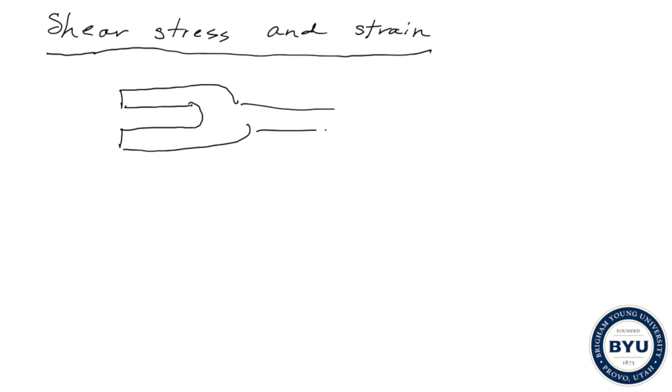So we're going to introduce shear stress today through an example of a bolted connection. Let me draw the geometry of our example here. Okay, still getting used to this tablet thing I'm using. So this is one plate here, and then there's a bolt here that is coming down through the geometry of the connection and keeping this connection tight.

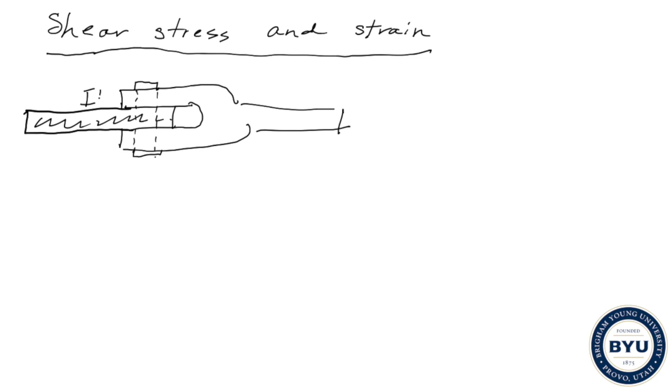So the dimensions here are h and h. Then the thickness of the plate is going to be t. And similar to what we did with normal stress, we're going to go ahead and load this thing up with a force P on both sides.

Notice that here, rather than being just a simple axial bar with a prismatic cross-section, we still have an axial load, but the configuration is different. So your intuition tells you that if the force P is large enough, this bolt actually will shear. We even use the word shear. It will shear off, and the stress that develops that causes that to happen, we call shear stress.

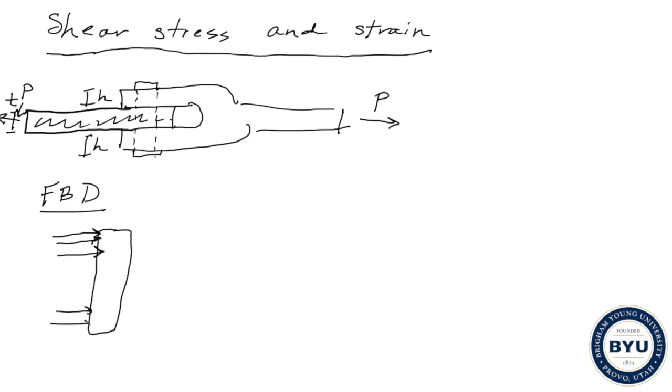So if we go ahead and look at just this part of the connection in terms of a free body diagram, it looks something like this. So we'll take the bolt out as a free body. We'll draw the forces that are acting. We have this distributed force coming from this top part here, and then a distributed force coming here. And likewise, on the other side, we have a distributed force.

Now, if we turn these distributed forces into resultant forces, you should get the expected result that the resultant force should have magnitude P, and that these resultant forces, as you can guess, should have magnitude P over 2. So that's a free body diagram.

Now the question is what are the internal forces that develop in this free body diagram, this bolt? These are the applied loads, the P over 2 on the top and the bottom, and then the P here. But unlike before, where we just had a very simple stress state, the stress state that develops, the internal force stress state that develops in this, is quite complicated.

And to introduce the idea of shear stress, we're actually going to look at those internal forces right on this shear plane. And what we'll notice is rather than having stresses that are acting normal to the cut plane, they're actually going to act tangential, as your intuition would dictate.

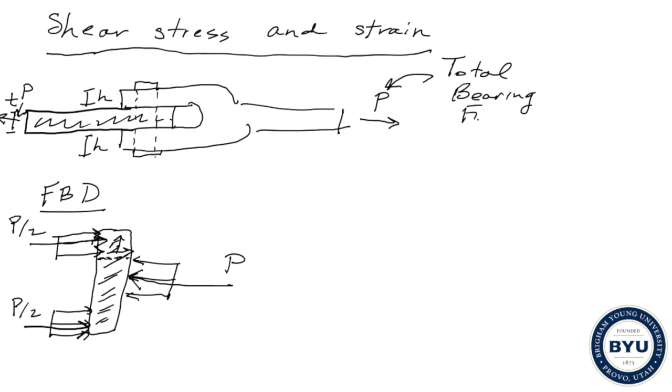So often we will call P the total bearing force. And then the question is how do we really deal with this curved circular geometry when we're engineering bolted connections?

So let's take a look at a close-up, a little bit more detailed drawing of the bolt geometry. As best as I can do here as I learn to use this tablet. It's not very good, but you get the point. Now if we look at the image, if you were to, for example, project the image of this bolt as a shadow onto a wall, it would actually look like a plane, wouldn't it? Something like this.

Okay, so this here would be kind of the projection of this bolt onto a plane. And so even though if you were to look at these resultant forces, these distributed forces, I should say, they're actually, in reality, kind of wrapping around the circular geometry in a very complicated way.

Rather than actually capturing that circular area in order to calculate the stress, what we'll do instead is idealize the bolt to a plane. So we'll say the cross-sectional area over which we're going to distribute the internal force is just going to be this plane. We'll call this A sub B, the area of the rectangle.

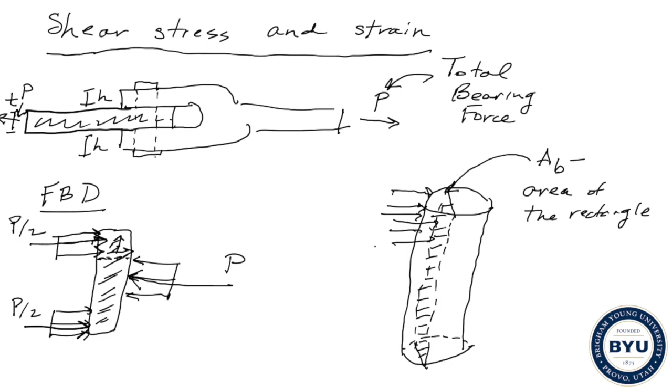Okay, and again, we have this distributed load acting down this beam, and that is going to be our bearing force. So what we'll say is, if you take this bearing force in a bolted connection, like for example, this little close-up of the bolt perhaps is just this piece right here.

So if you look at this bolt, the way that we calculate what's called the bearing stress is simply F sub B over A sub B. Now notice that this actually isn't exactly right. This is what we would call an engineering idealization. We've made an engineering assumption that by picking this area here to simply be the rectangle, that's close enough to the actual stress from a design perspective.

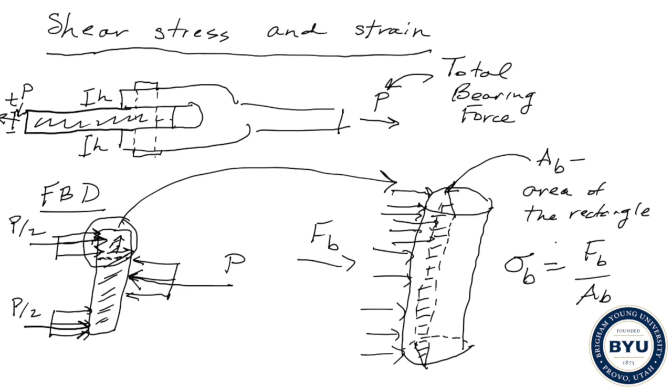Okay, now let's develop this a bit further, this idea of stress. Let's take a look at a different free body diagram.

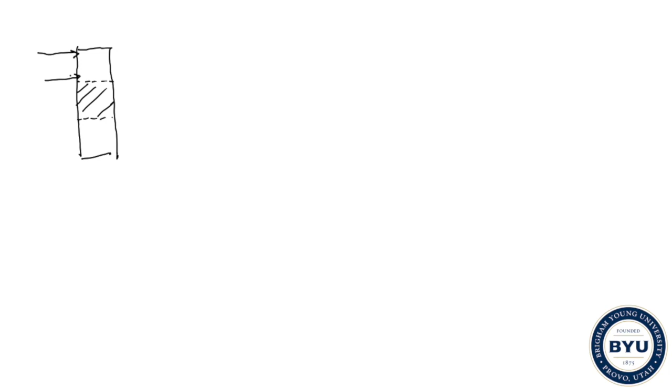So let's draw our bolt that's in shear. We have our bolt, it's in shear. And instead of looking at those top and bottom portions where we introduce the idea of bearing stress, let's actually take a look at this middle section. This is as it was before.

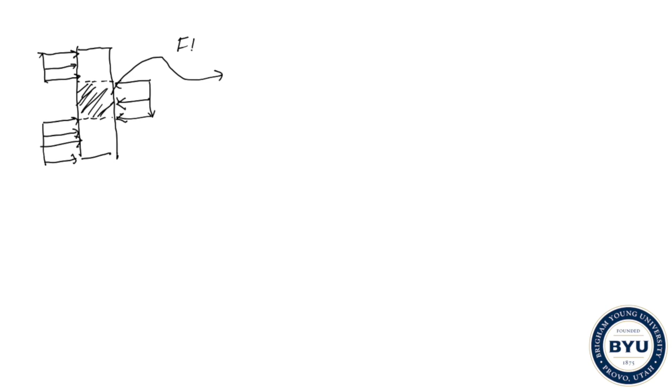Now what we want to do is pull this thing out here as a free body diagram. We're going to look at all the forces acting on that free body diagram. So the free body diagram is this part of the bolt here.

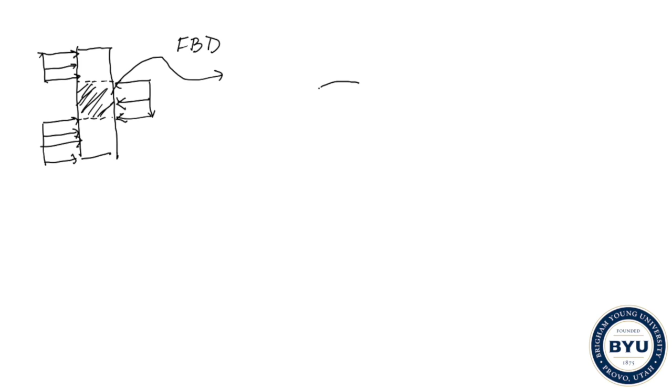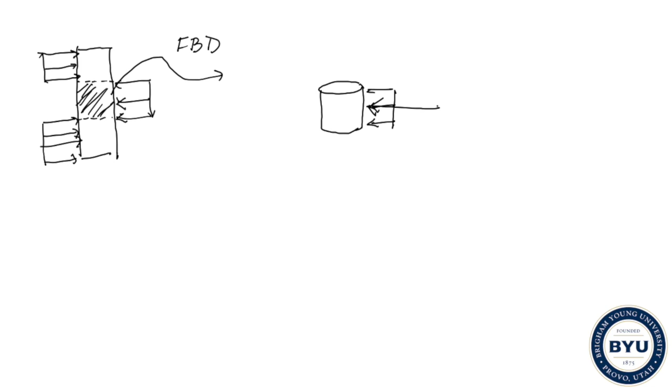And then we've got this distributed load acting on this side, which we will resolve into a resultant force. This is often what we do. This resultant force is magnitude P. And then there are forces here.

If we want to have a balance of forces, we have to figure out what forces are acting across the top of this bolt, right? Because there are forces over here that have to be accounted for in this free body diagram in order for us to have equilibrium.

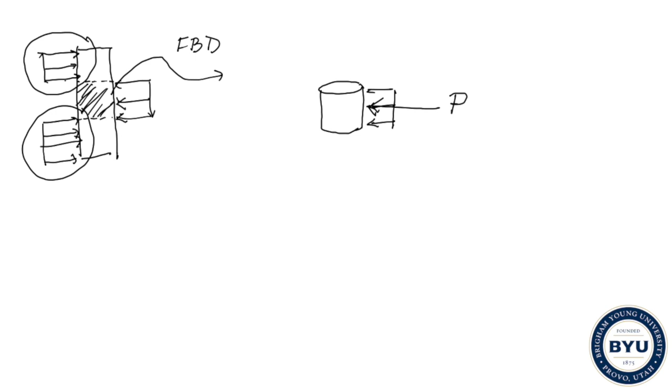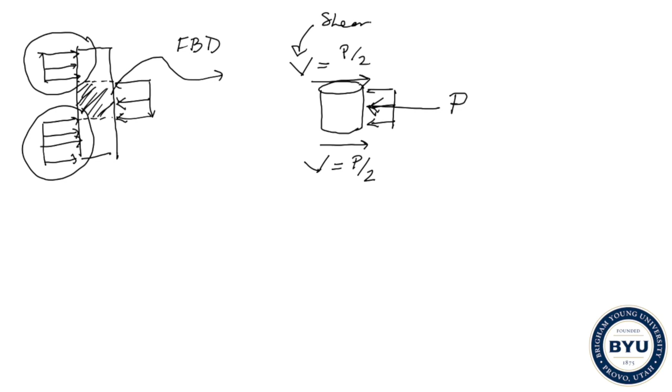And so the resultant force coming from here we'll just call V, equal to P over 2, acting like that. And then this one is likewise P over 2. We'll call this a shear force, for example. Let's see how it's shearing across the top of this bolt.

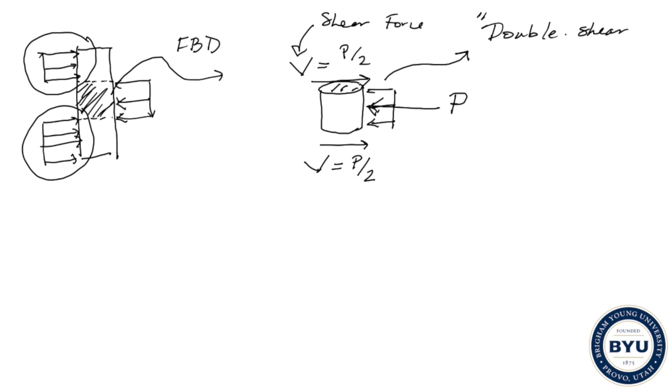And so in this case, again, going back to this idea of introducing vocabulary for bolted connections, we call a configuration like this, where you have a piece of a bolt where there's a shear force on the top and the bottom, double shear. And that shouldn't be a surprise. Single shear would be, for example, if the only shear plane was this top one or this bottom one, but not both. And you can have triple shear. Any number of shear planes that develop in a bolted configuration, we just call it whatever you want to call it, single shear, double shear, triple shear.

So this now brings us to what we need to introduce the idea of shear stress. And again, I want to reiterate this concept that we're examining the idea of stress through particular applications.

The first application was an axial bar in tension and compression, and that allowed us to begin to understand an idea of normal stress for internal force over area. Now we're studying the application of bolted connections and introducing a little bit of design vocabulary there. But really what we're after is the configuration right here that will allow us now to introduce conceptually the idea of shear stress.

So we're going to do that a few more times, and then about halfway through the course, or two-thirds of the way through the course, we will actually introduce the total concept of stress that incorporates all of these kind of snapshot views that we're taking of stress.

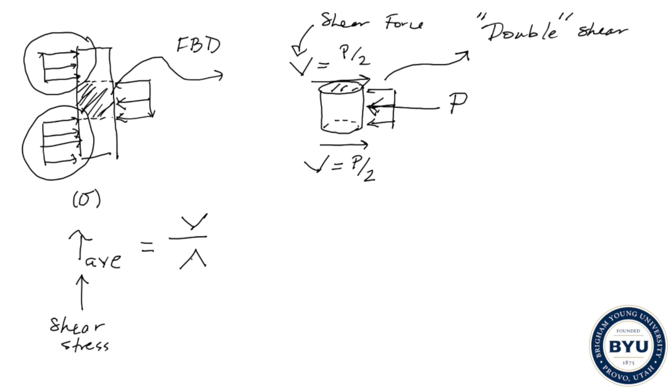Let's use the symbol tau, and in this case we'll call it tau average. We'll call this thing shear stress, and we often use the symbol tau to denote a shear stress, whereas before, if you recall, we used sigma, another Greek letter, for normal stress. The concept is very simple. It's still a kind of resultant internal force, but this time it'll be the shear force distributed over the shear area. Up here, this shear force corresponds to P over 2, and this area is the area over which we distribute this load. The average stress up here would be the same as the average stress down here, because the area and the shear forces are the same.

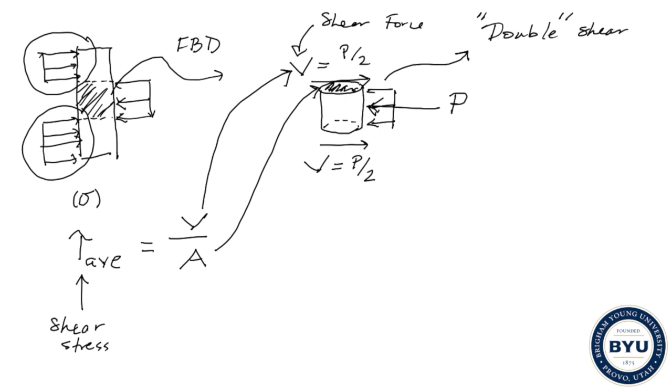Now, let's, as we did for normal stress, introduce the idea of strain. We'll introduce the concept of shear strain. Again, before when we talked about normal strain, it was very simple. It was delta over L, and your intuition really guides you to that perspective.

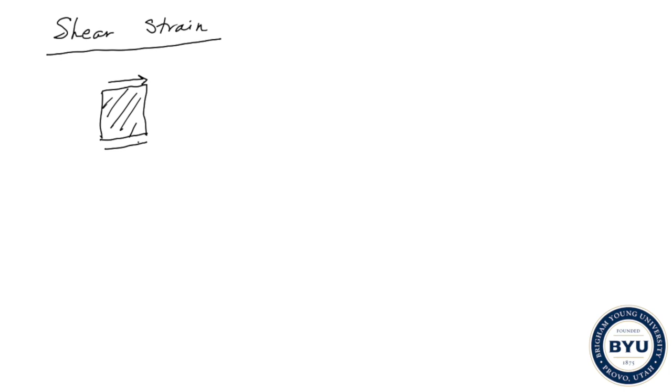But if you think about shear strain, what's happening with an object in shear, it's taking something like this little piece of material, subjecting it to, for example, some kind of shear forces, and you would anticipate that piece of material would be deformed into this parallelogram. So this is the kind of geometry of shear strain, which is different than what we introduced for normal strain. This is an important part in mechanics, the development of the appropriate strain measure for the phenomena of interest. For studying shear, we need to understand how to measure this kind of deformation. There's not stretching or compression going on. It's more like the object is simply changing shape, but the area, for example, is staying the same. That's consistent with how we understand shear strain.

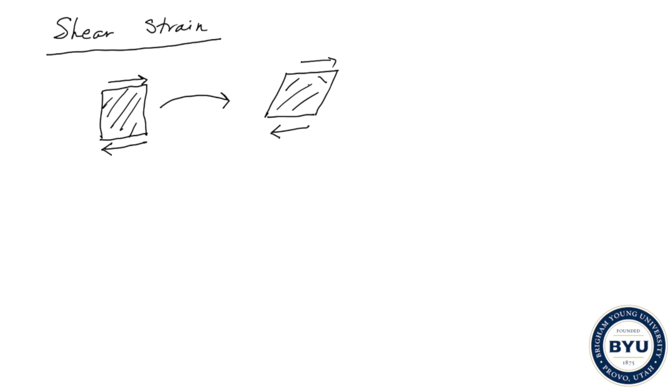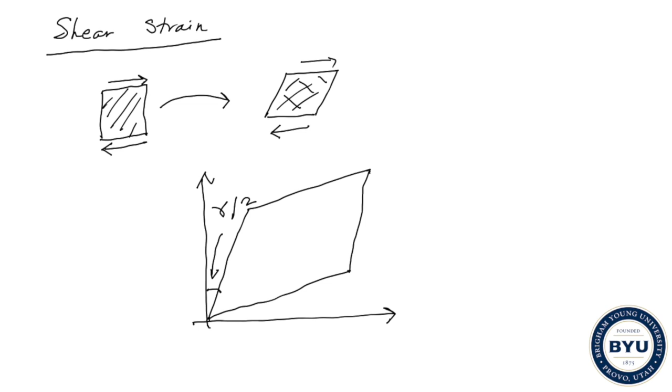So to make this idea of shear strain a little more precise, let's draw a little material element in its sheared configuration. It looks something like this. Now we know that the total angle between the two axes is pi over 2. We're going to call this angle in here gamma over 2, and this angle in here should be equal, gamma over 2. And then this angle in here, of course, must be pi over 2 minus gamma.

These angles, the symbol gamma, is used to measure the total distortion of the element, including both this upper distortion and this lower distortion, because the strain measure you use for shear has to reflect the geometry of the deformation. So this gamma, rather than being like an elongation, this is actually a small angle. But we usually won't carry these units around. We'll say that this is, in some sense, unitless as well.

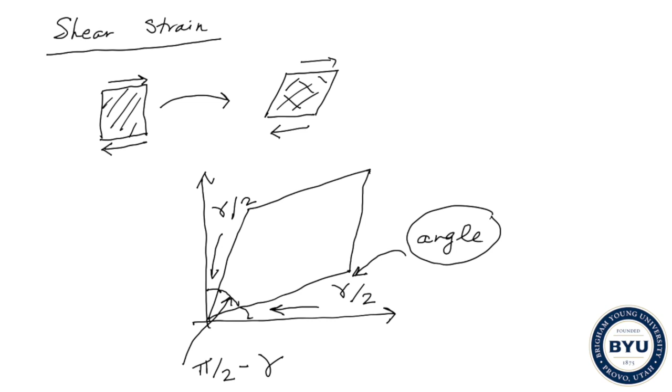Now, we've got the idea of shear stress, we've introduced that, and we've also introduced the idea of shear strain. A fundamental thing in mechanics is shear stresses are a reflection of the internal forces. It's a way to measure the internal forces that develop in an object. And the strain is a way to measure the internal deformations. So what you want to do is connect them. Given some internal deformation state, what is the resulting shear forces?

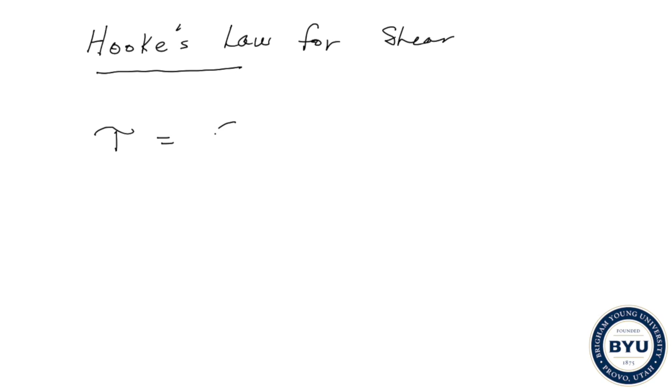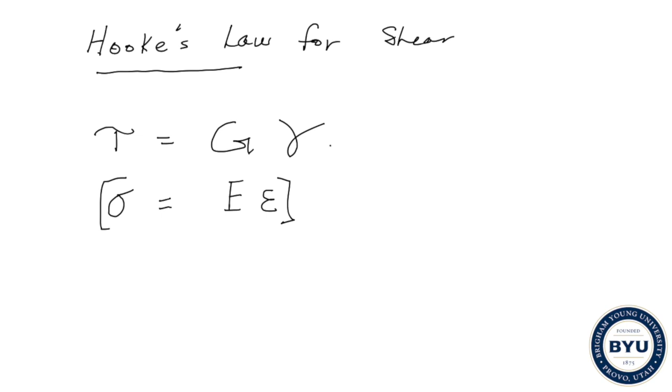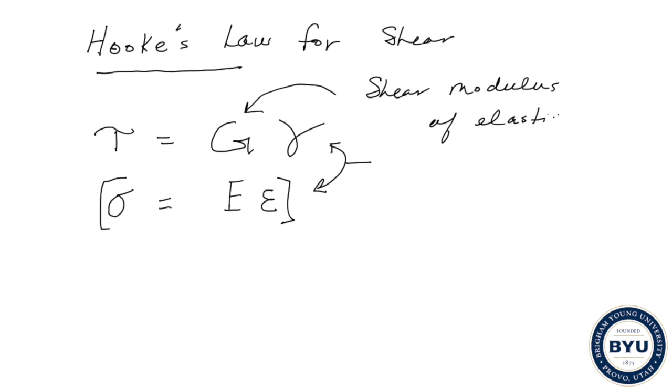And so there is a Hooke's law, just like there was for normal stress. We'll call this Hooke's law for shear. The shear stress tau is equal to a measured quantity, G, times gamma. You can see that this is very similar to what we did before. Remember, in normal stress, it was sigma equals E times epsilon. So this is what we did before, if you recall. They have the same kind of mathematical signature, but they're measuring different phenomena. We call G the shear modulus of elasticity, and this, of course, is the Young's modulus.